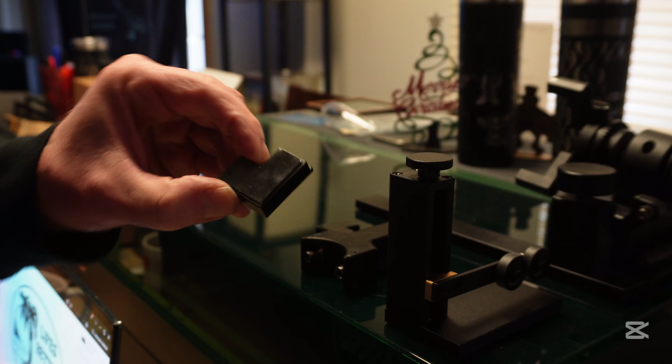All right, so we're gonna just go over here. Here's all the stuff it comes with. First off, comes with these little 90-degree feet you can place in there, and it'll hold the base better. I don't really use them. You can take the tape off and tape it down, but they come with that. So next thing up is the base itself.

It comes with this base. The chuck is from the rotary tool. You take the chuck off and the belt off, and you put it on this base here. And what this base helps you to do is one of the easiest things. It has a knob here, and by turning this knob, it angles so you can get your glass level much easier. And it's lengthwise this way, so it makes it much sturdier.

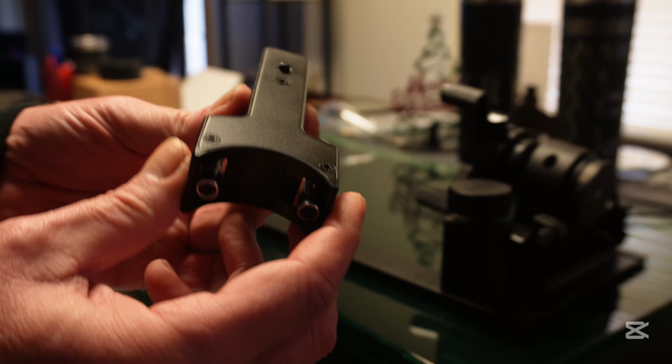And of course, the one thing everybody's been asking about is the laser. This is a green laser. When you turn it on, you can see it makes a green laser light straight. And where you put this, right here at the top, this gets placed by the dowels right in these two little holes, and you put it down, turn it on, and you have a green laser light showing right down the center of the chuck axis. Makes it much easier for pickup and making it horizontal. Comes with batteries and replaceable batteries, and it's just a nice piece of equipment.

Now I want to fit my glass into the chuck here. Now I could open the jaws up and place it all the way in to hold it. And that's probably what we're going to do here. Okay? So to hold it in, we put the glass in, and the back of the glass is all the way to the back of the jaws to help hold it down. All right?

Or we could go from the top and hold it in that way. And then we have all this area for engraving. But if we hold it from the back, we're holding it from here, so we have from the back to the front. So it all depends on where you want to put your engraving. You want to put it closer to the bottom, closer to the top.

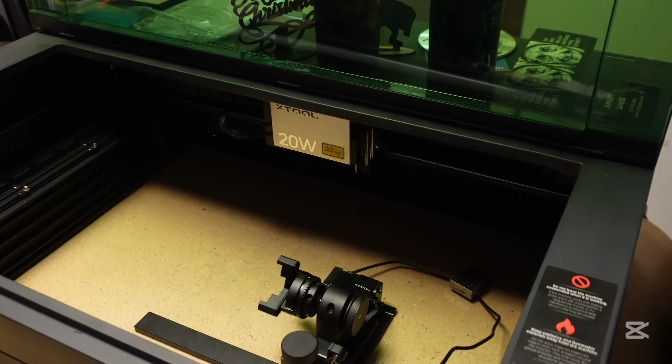And what I also like to do is I take one of my hard blocks here and I place it down on the wire so the wire doesn't get in the way. I just let it sit on there just so it doesn't get in the way. Okay? So here's what I have. Alright, the rotary tool is inside, the wire is plugged in, and I got the block on the wire so it doesn't get in the way.

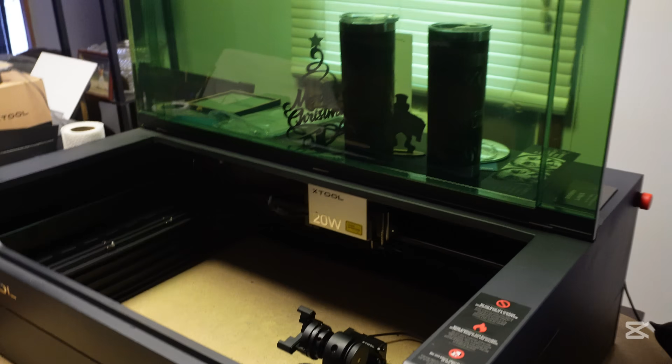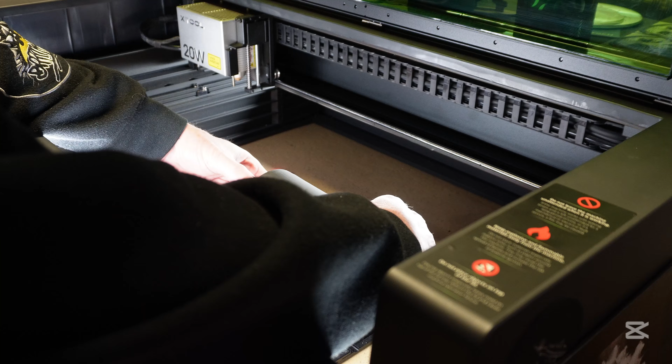Alright, now it's not aligned, it's just sitting there. I have yet to turn on the machine. Alright. Now I'll turn on my machine and let it... Alright. I will take my jar, or glass actually, and we'll place it. Now I'm using the jaws on the inside of the glass. I'm placing this inside the glass, trying to get the back even here.

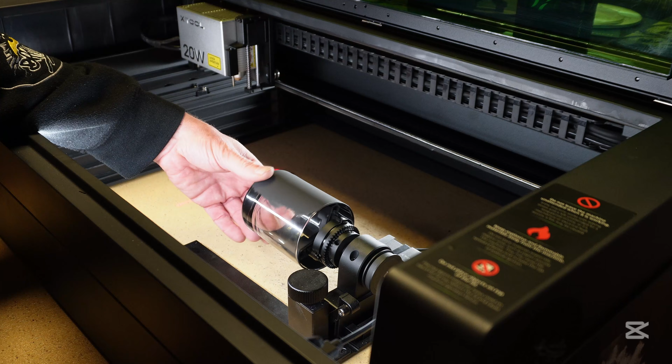I'm watching the back. I'm turning the chuck here. I'm watching the back to see if there's any wobble. And it's not too bad. Alright. So we'll tighten everything up, snug it up, and there we go. Now I take my red laser light. Alright, I place it into the chuck here. Oh, wait a minute, wait.

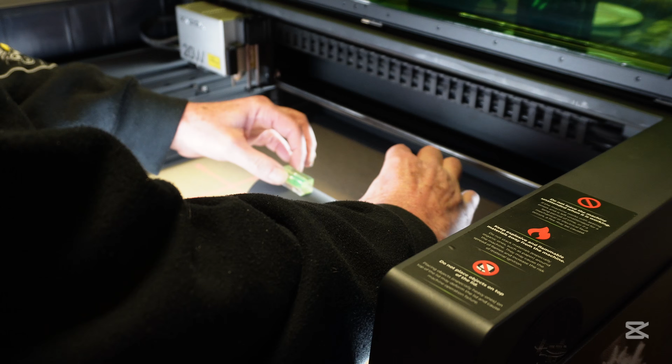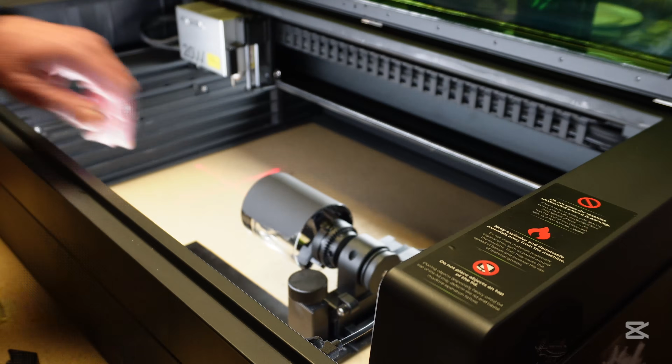First, let us level this. And by turning this knob, it's level. So I'll look at it in a couple spots. Not bad. So I'll take my laser leveler, or laser center finder, put it down in the chuck and turn it on. And see how it makes a nice laser light right down the center for easier pickup.

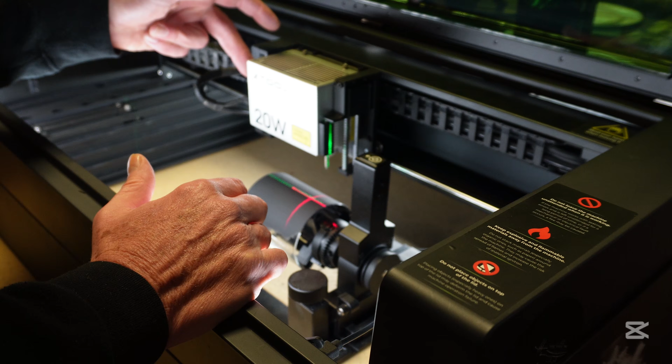And I can tell I'm way off. I just move this over. Oh, still a little off. And there we go. I'm on center. All right.

Here we are on the xTool website, the Canadian site. And many people here are asking about my center piece for picking up the red laser. And this is the xTool accessory kit for the RA2 Pro. Very worth it. I'll show each individual piece that I have here. But this is the one on the computer. Right here, this one right here is your center. It fits in the chuck and, when you turn it on, it puts a red laser light down the center of the axis, of the x-axis, to easier pick up center.

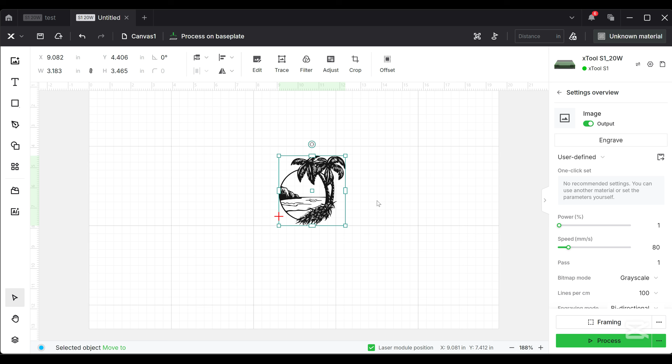And don't worry if you make a mistake. For example, say you make a mistake and go, whoop. Just go up here, undo. All right. Now that we got that, I just hit save. And there is my background beach.

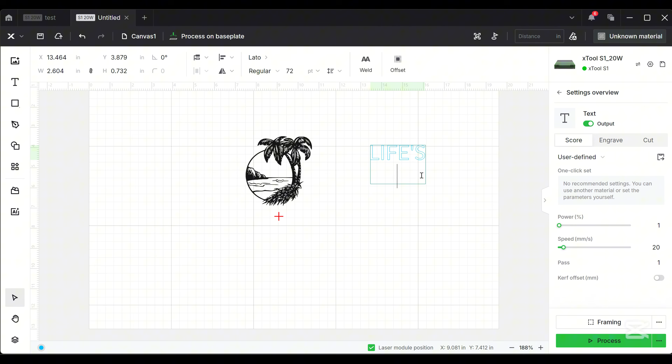Going to add some lettering now. And life's better at the beach. All right. I'm going to use the engrave there so I can see it better.

I'm going to change the font. I always like something a little crazier. No, you know what? I always like this. I like the gorditas. They're always nice. So we're going to take that and we make it a little smaller so we can fit it beside here.

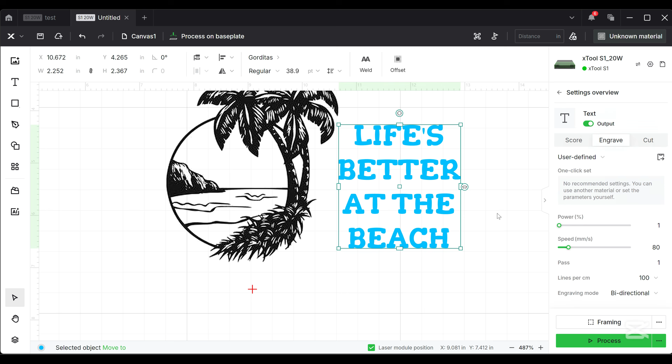That looks nice. All right. Now, let's make a nice oval around it. So we'll just do a circle. Move the circle a little bit. Move that in a bit. Not bad, not bad.

Let's bring this down a little bit. And move this in a little bit more. There we go. I like that. Let's move our lettering here a little bit up. All right, that doesn't look too bad. Now let's make it even better.

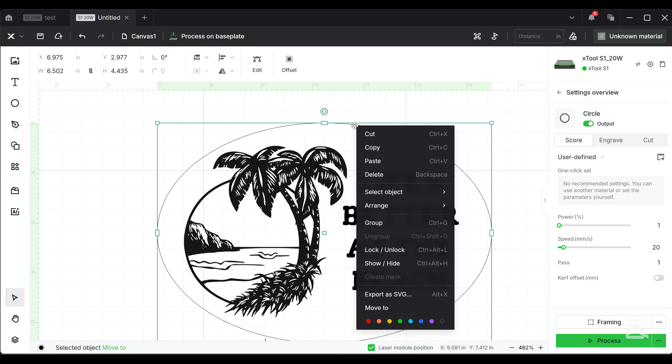I'm going to take all this and I'm going to put it on my black layer. And I use my black layer, that's my black lettering, my black marking when I'm using the white chalk. But first of all, we want to get the oval frost in the background. So I'm going to move that to the yellow. And if I click engrave, you see that it becomes solid. So that's going to be my frost layer. But I'm going to click it back to score so it's not filled in.

I'm going to copy it, or sorry, I'm going to take it, pick it up, there we go. And what I'm going to do is I'm going to offset it. Now I want to do a both offset, so I'm going to do external and inner. So if I do an offset of, say, 50 thou, that'll give me 100 thou, almost an eighth of an inch line. Let's see, what does that look like? And that doesn't look

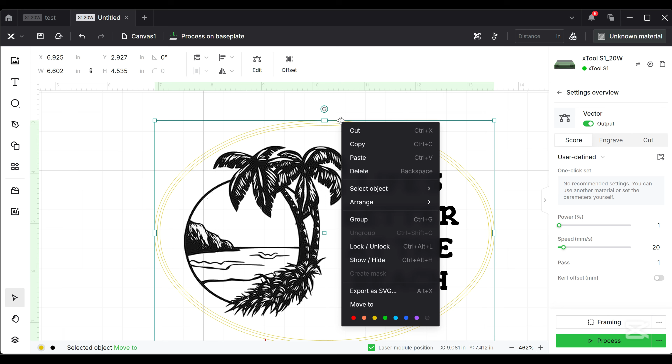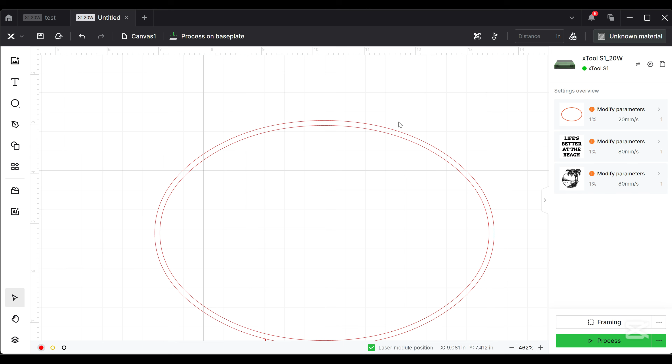too bad. So what I'll do is I'll take the first line here, and let's move it to the red. And I'll take the second line and I'll move it to the red as well. Okay, now I'm going to turn off my black and my yellow. I'm left with this ring. Now if I take this ring and I say engrave, it'll engrave the whole thing. I don't want to do that.

So what I do is highlight both rings. And which one of these? Unite? No. Alright, see, hit undo. I believe it is subtract. No. Subtract overlap. And if I click engrave, I get left with this nice ring, which I'll move back to the black section.

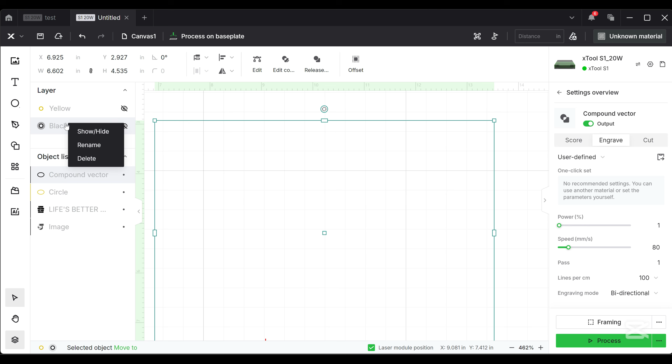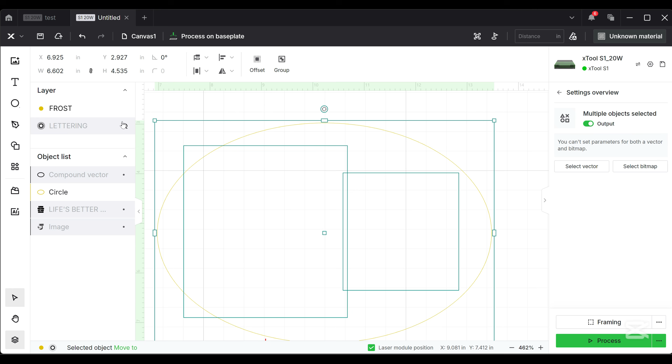Now, I'll rename my black section Lettering. And my yellow section I will rename Frost. So that when I turn them on, there's my yellow and there's my black. Okay, so this is what we're going to be engraving. And now, I like to save. We're going to save it under glasses, we'll save it as beach. All right. Now, we have that all saved.

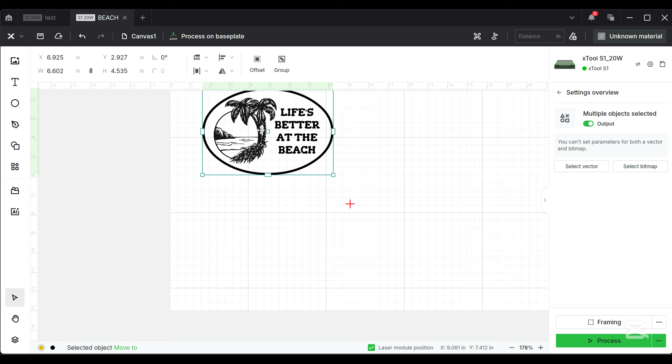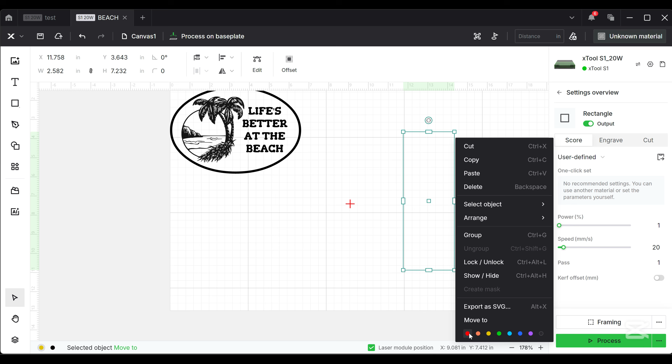All right. Now, I'm just going to move it out of the way. I highlight everything so everything moves together. I have to draw my actual glass here. So, we're going to do just a plain rectangle. There's our rectangle. We're going to move this to the red. Now we're not outputting it, so we're going to click off output. This is going to be my glass.

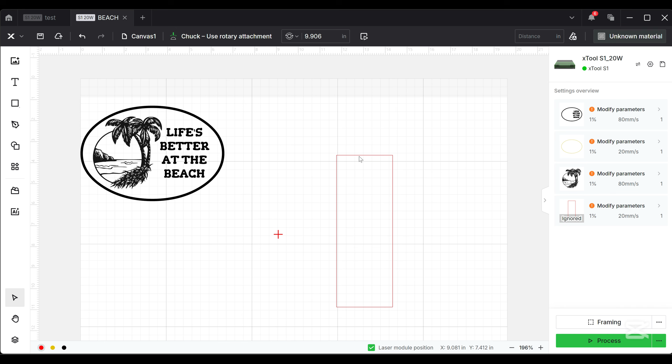All right. Now, let us switch from process on base plate to chuck. There we go. We're going to put in our diameter here at 3.152. And if I switch from diameter, come on, to perimeter, it tells me 9.906. So what I do is I take my rectangle and I make the height 9.906. And I know I've got 3.5 inches over here.

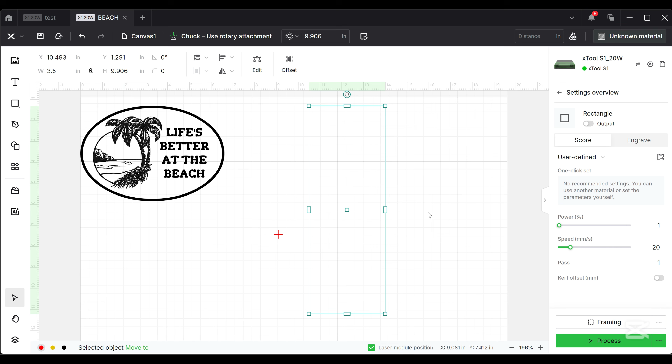Oops. I've got to turn off the lock. 9.906. This is now my glass. All right. Now I'm only doing the engraving on one side. I'm not doing both sides, so I'm not going to do a half square so I get it even. I'm just going to put it all on center. So I'm going to go over here.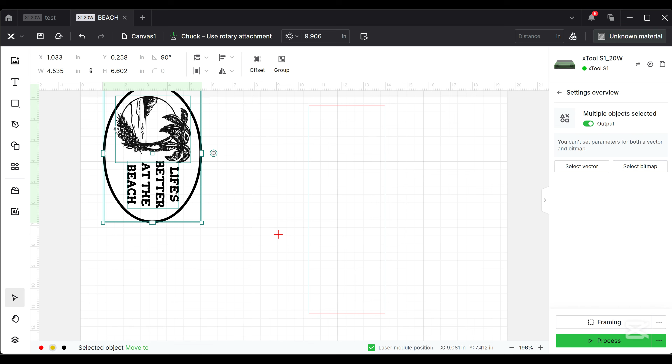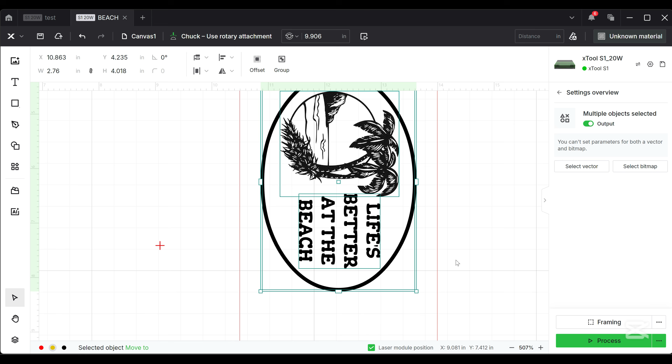Now since the front of my glass is here, I have to rotate this 90 degrees. All right. So I can now take this and let us fit it in. There we go, we're on center. Let's get it a little bigger.

Move it back on center there. And there. All right. And then we're going to save everything again. All right, now that we have it saved, let us modify our parameters. Our bottom one is our glass, which is ignored. We don't want to do that.

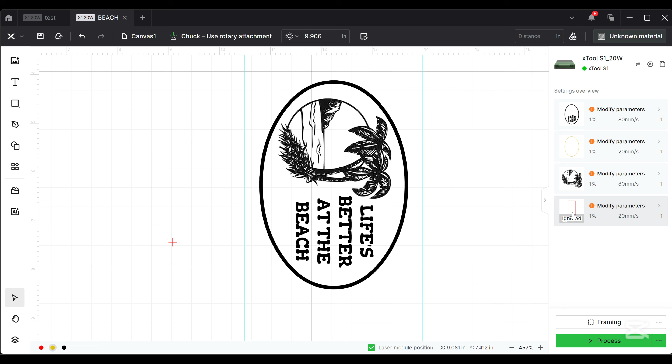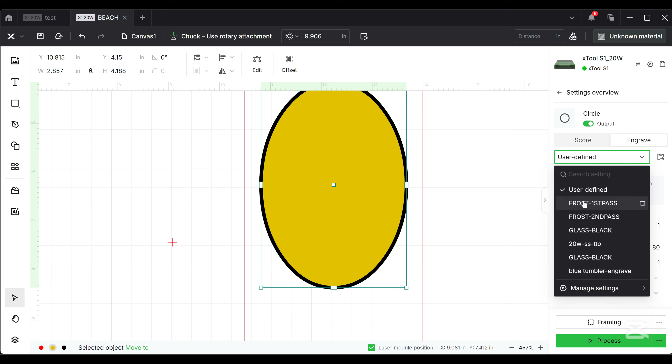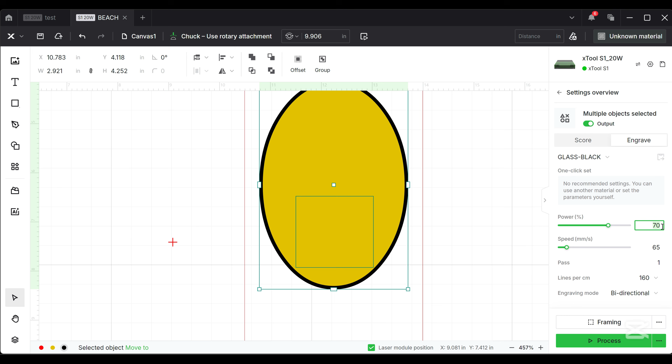Here's our frosted layer. And of course, we're going to engrave it, and we're going to use our frost first pass. All right. Now, for all of these ones here, we're going to use our, where is it? Glass black. And I'm going to switch this down to 50%. I've been finding 50 is pretty good.

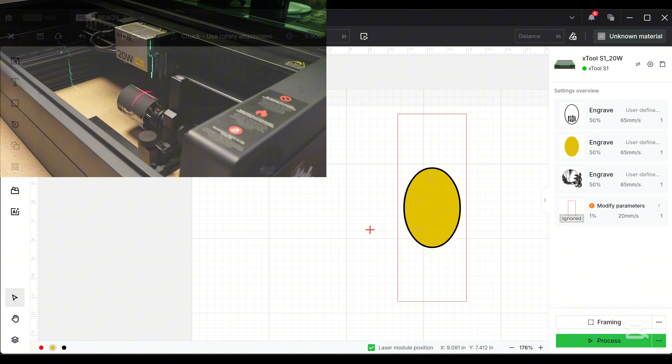But for now, we have to switch back, and we got to pick up the center of the glass and pick everything else up, okay? So that we get our line in here, and we have to move everything. So let's do that. We are switching over to the machine. Now, we have it already on center. So let's go ahead and pick up the top. Now when we pick up the top, that'll put a green line showing our center line into the program here. So let us pick up the top.

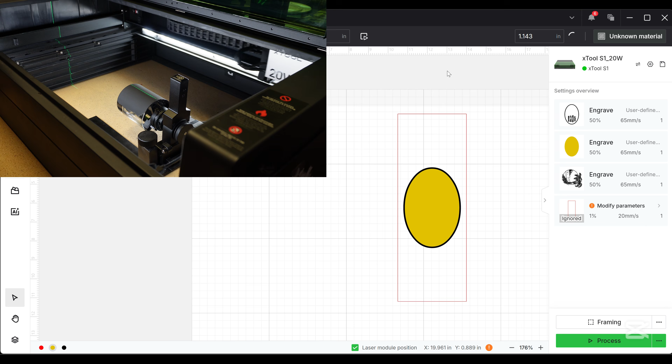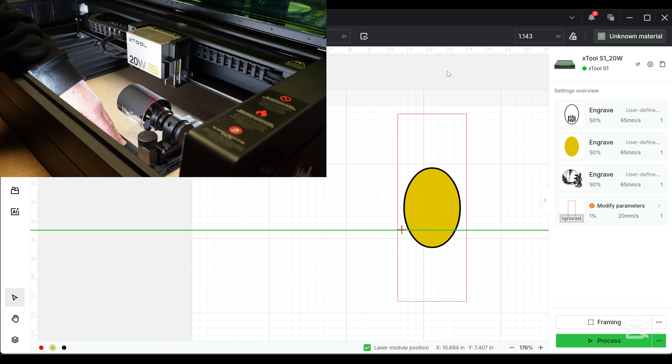Okay, and let us pick up the top of the glass. So I move the module over to the top. There we go. Now I'm going to remove my green laser, and this will be now in the program. Okay, now we're back in the program. We have our center line. We have our red pointer here at the top of the glass.

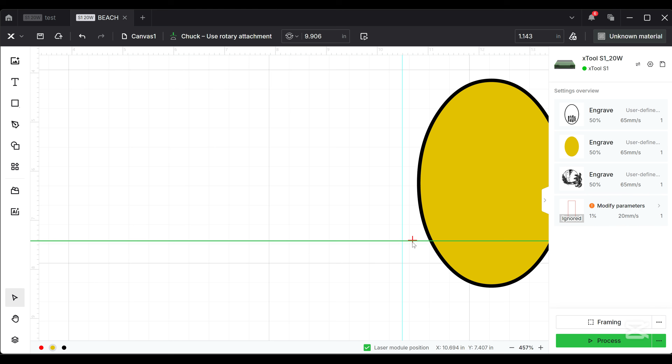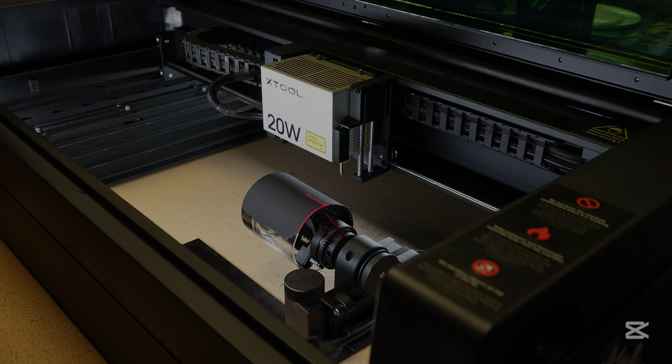Now we have to take everything and we have to move it. So let us move this. There we go. Everything is on center. Everything looks good. Now for our black, we're going to hit ignore because we don't want to do anything black now. We just want to do the frost. Okay, it's all on ignore. All right, so I'm going to frame it in, and then we'll start cutting. Let us frame everything in so we see where it's going to be. And we'll be able to see if this wobbles too much.

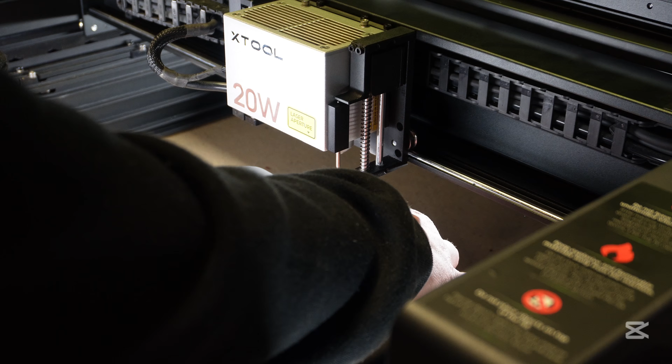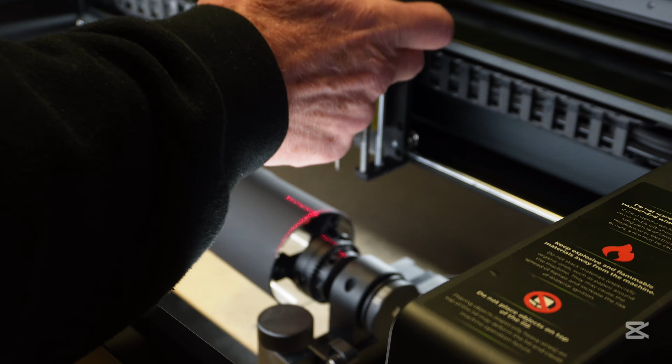Okay, I don't like it, it's a little too close to the black. So what I'm going to do is I'm going to find the center of my black paint here, which is roughly right about there. All right. Now what I'm going to do is I'm going to re-pick up the top.

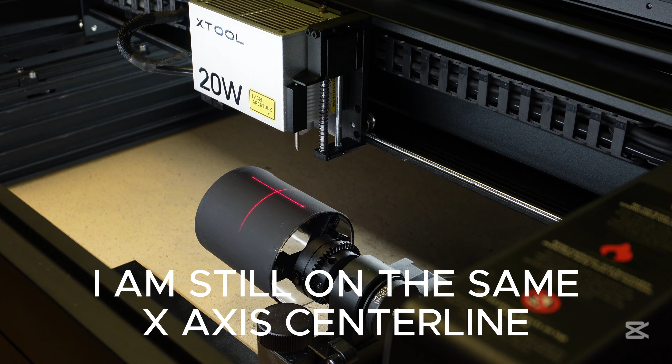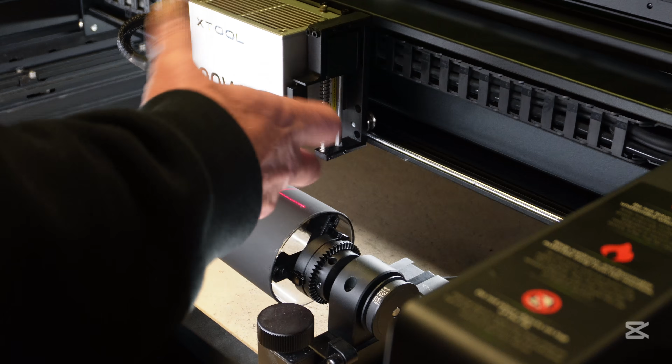Now by re-picking up the top, that orientates the center of my black paint to the glass. I'm going to move this to the front again, just to double check in the program. All right, everything looks good. I'm going to frame it in again. And that's more on the black.

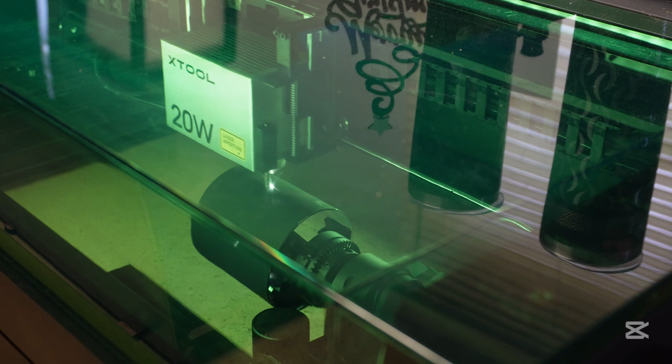All right, so now I do two passes with the frost. So let us do the first pass. Air assist is on. And off it goes. Alright, that came out really nice. Now what I'm going to do is I'm going to run a second pass at half power. And we'll run it again.

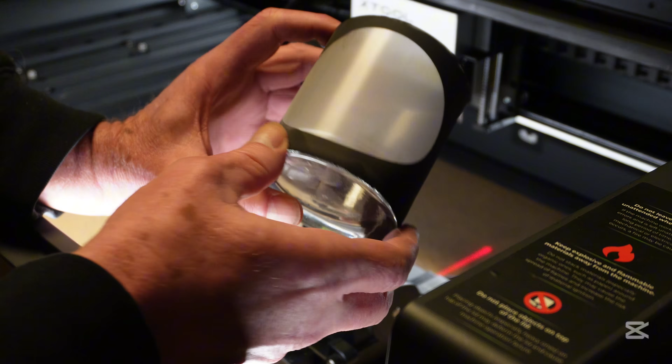Alright. Let us remove it. You can see it created the oval frost. And we have a little problem here. This is where the jaw was. And the jaw, being black, absorbed the laser. So it actually lasered the jaw a little bit. So a little bit crooked here, but we'll see if we can fix it. Let's go clean it up. And then we're going to be applying the white chalk paint.

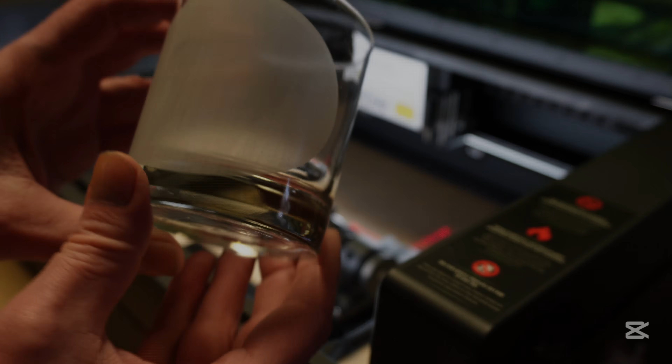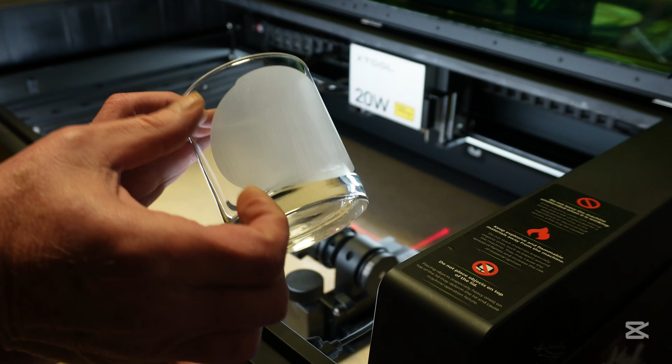Alright, so after cleaning, the frosting came out pretty nice. We do have a little problem here from the black jaws to over here. It looks like the oval was shifted a little bit. I don't know why. Could be a little inconsistency in the glass. Seems like there could be, but I'm hoping that the ring will cover that up.

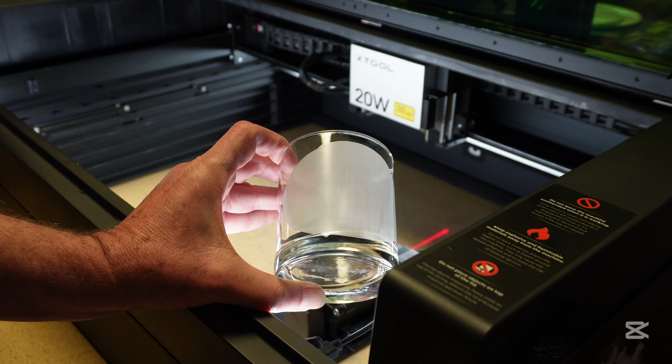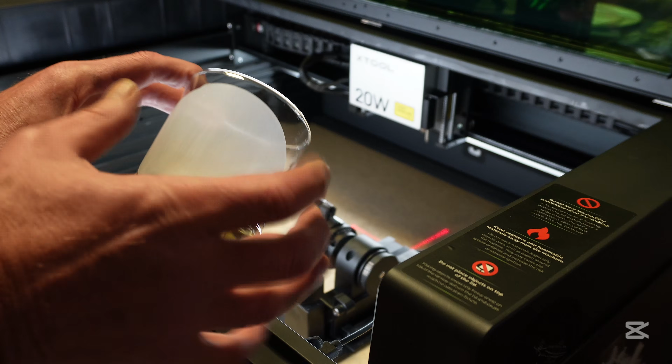Alright, so we're going to get the white chalk paint on there, let it dry, and show you how to re-pick it up. And this is going to be a little bit on the difficult side because this is an oval. So all we can go is from center, and then we're going to have to pick up the top or the bottom and manipulate it a little bit. Alright, so let's get the white chalk paint on there, let that dry. 2 coats, and we'll get right back to it.

Alright, now that the frost is done, it's cleaned up, I have the white chalk paint painted on. Now we have to put this in and pick up the oval, so that our black lines will go over top of it and then everything else will be in the center. So let's set that up into the machine and I'll show you how that's done. Okay, so I'm going to set this up.

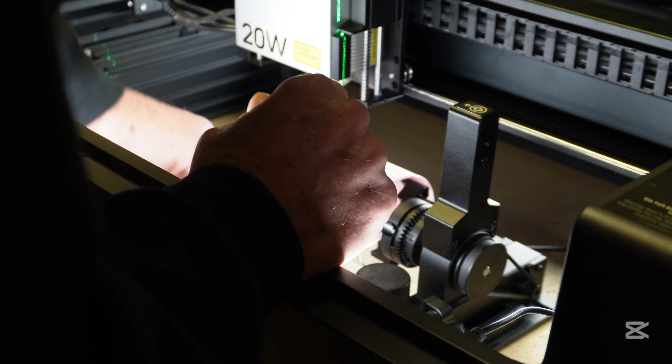Now, got it tightened up. Now what I'm going to do is I'm going to put in my center here. And this is just to pick up the alignment in center. I'm not picking up the top or anything yet. All right. Okay, not bad, not bad.

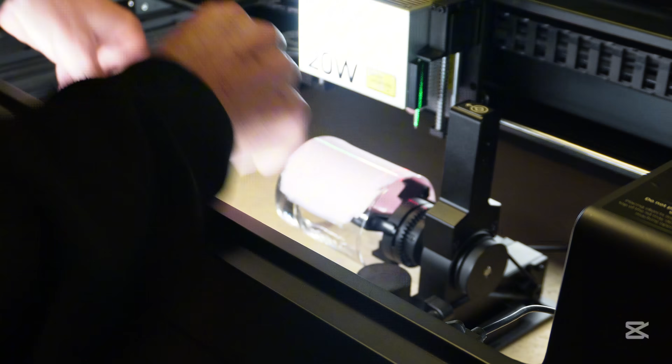So, what I'm going to do, grab my flashlight so that I can see into the center of this thing, hopefully. No, maybe not. There we go. I'm trying to pick up the center of the oval. I'll move that for a second. I can see my oval here. It's pretty close. Over to here.

Alright, that's pretty much the center of the oval on the x-axis. Let's make sure this is still in line. A little bit off now again because I moved it just a tad. Go back to the center there. The edge. And the edge is right there. Okay.

Now I haven't picked up the top, so I haven't put the green line into my program yet, but that's what we're going to do right now. So now we're going to pick up the top. Now, the red pointer is at the top of my frosted engrave. So I'm going to switch this from engrave to score so I can see it better. And I'm also going to switch this to score so I can see that better.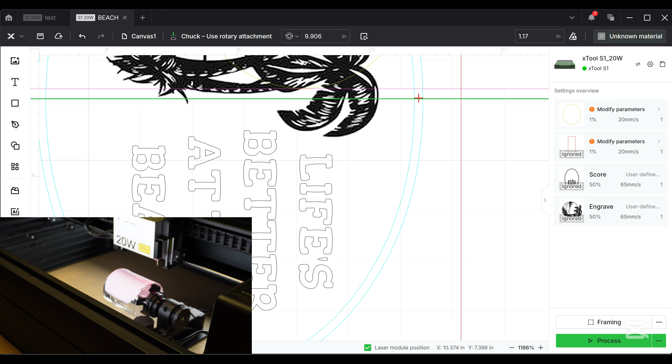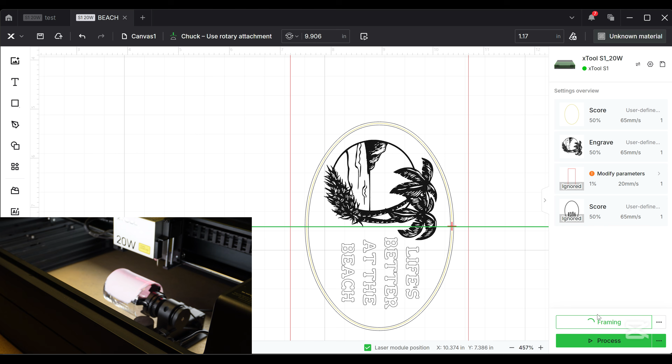Everything looks good. I want to move everything right to there. Okay. I'm going to score the top. Not this one, but my outside. Just to see. First I'm going to frame it in. Let's frame it in, make sure it's spinning good.

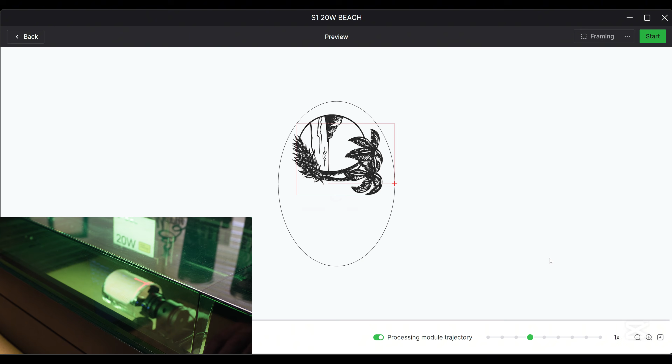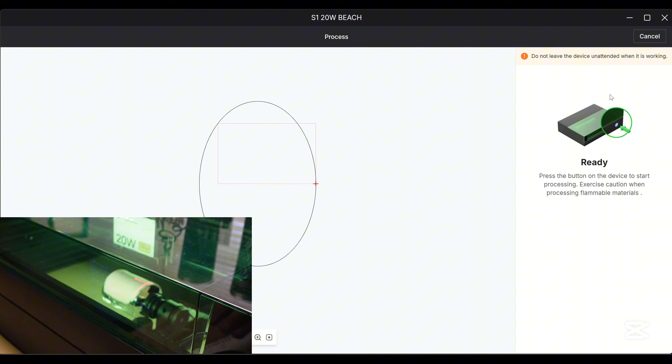All right, let's score it. I didn't hit ignore on that engrave, did I? No, I did not. So let's just score the top. Not half bad.

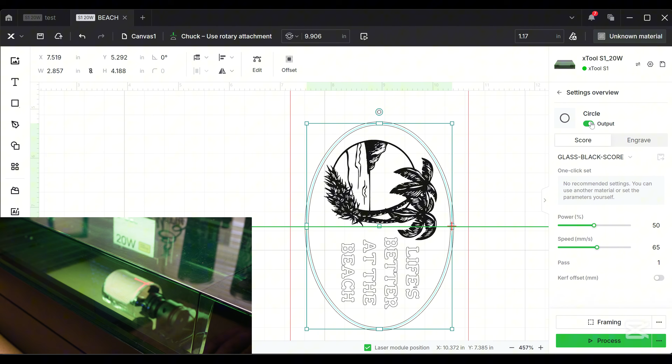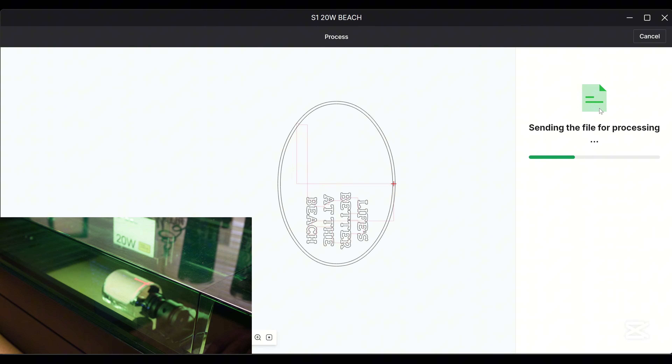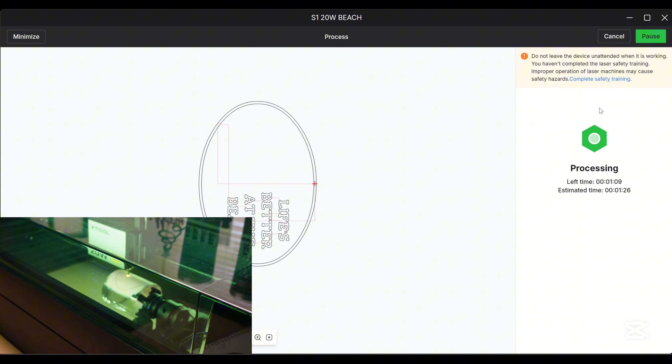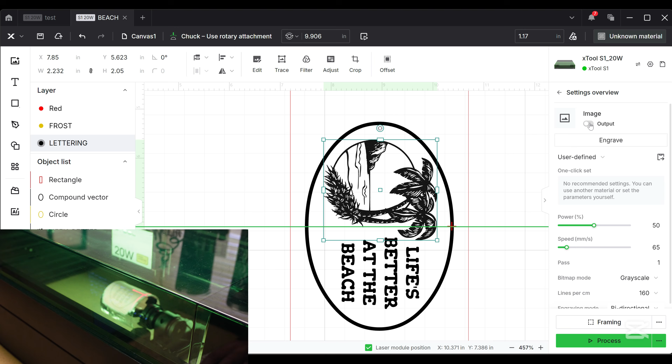All right, so now we're gonna cancel that output. I'm gonna go over here and say score all the lettering. I don't need to look at that anymore. I just want my lettering and my oval. Alright. The scoring came out good, so now we're going to switch this to engrave. And off we go.

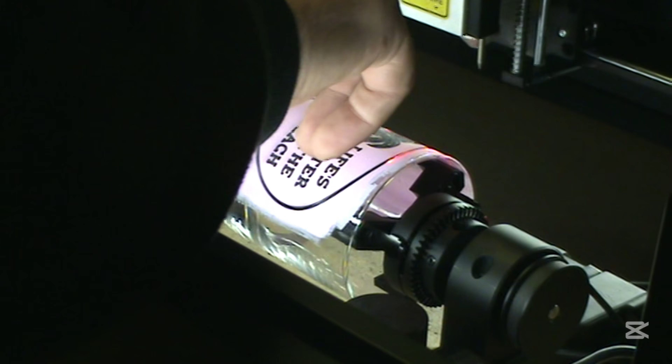Alrighty. Well, that came out rather nice. Push this back. There we have it. Life's better at the beach. Let's go wash this off and we'll see how close we are.

Well, after cleanup, the glass didn't come out too bad. There are some alignment issues around the outside. For some reason, the frosting is a little bigger than the border. But all in all, not bad. It's much harder to realign when you don't have an edge to pick up. Okay? If it's a square edge or something, that's a lot easier to pick up into the program and onto here where it's rounded. But all in all, not bad at all. I'm enjoying this glass work.